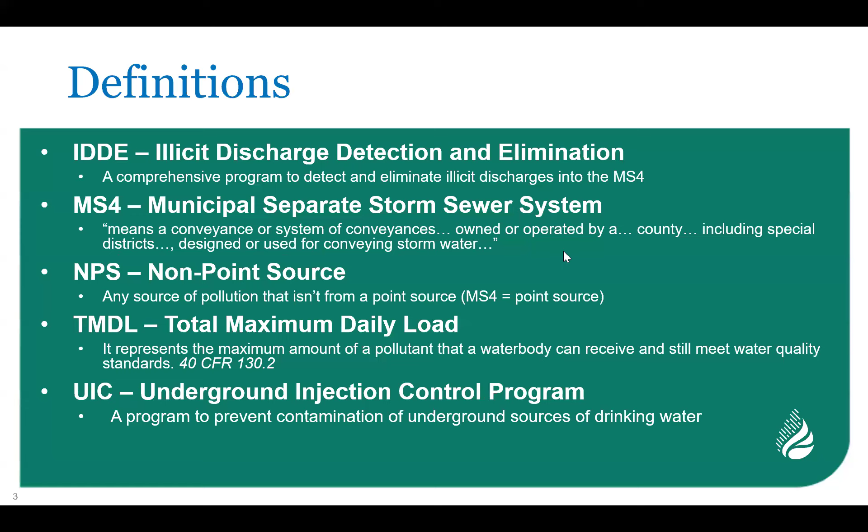A non-point source is everything that's not a point source. A TMDL, you can think of it as a budget of pollution that any water body can receive and still meet water quality standards. And then UICs are dry wells, in short. So typically concrete devices that collect stormwater and inject it underground, at least in our business.

So next, let's get into the difference between a combined and separate storm system. This is just a very elementary illustration of the difference between these two stormwater systems. A great example of the combined configuration on the left is what the city of Portland has, our neighbors to the north. And that's just a series of pipes underground that convey wastewater and stormwater to a wastewater treatment plant.

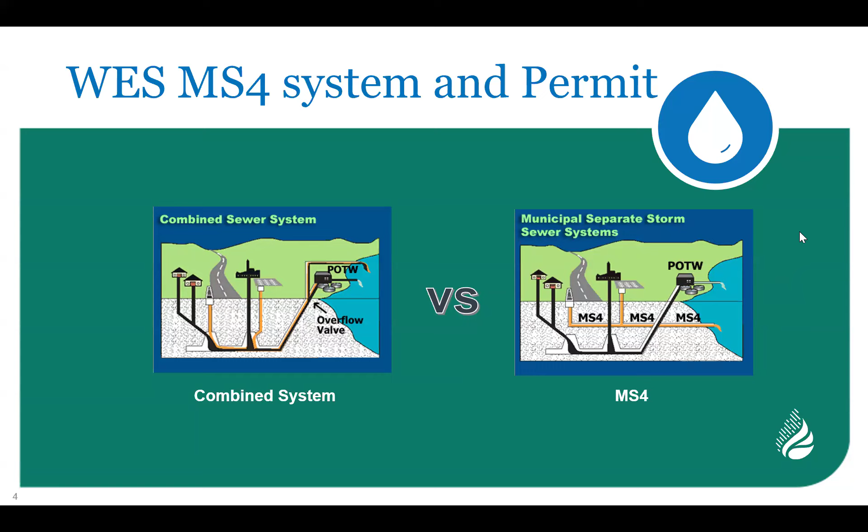This is how a lot of older, large cities were designed in the last century or two or older. And the goal then was to really just get the water away from the city to a river or to a treatment plant. As cities grew and stormwater began to overload those systems, newer communities started building these MS4 systems where the stormwater is conveyed underground, typically in pipes separate from the toilets and sinks and wastewater, which is sent to a treatment plant, and that stormwater is sent straight to a creek, typically untreated and not touched at all, so just straight into a water body.

There are different types of MS4 systems in Oregon, and how Oregon kind of separates those is into a phase 1 and a phase 2 permit. And what separates those two phases is the size of the community, and the cutoff is about 100,000 people that the systems serve.

So I like to use shapes just to think of things. And these two shapes, the octagon for phase 1 and the hexagon for phase 2, do not have to do with UFC fighting or anything. It has to do with minimum control measures, they're called. These are basically practices that the communities do in order to meet the MEP standard for these permits, the maximum extent practicable standard. So these are activities that a community will do to try to minimize pollution.

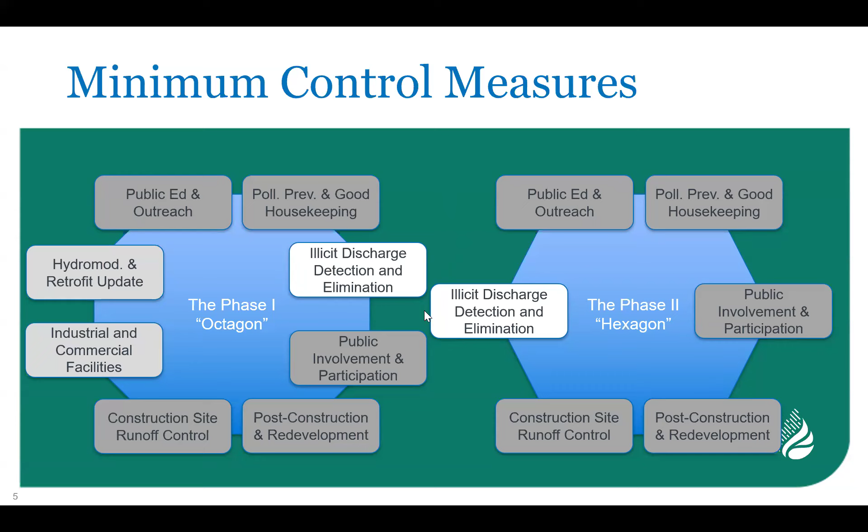And I think the highlight here is that the IDDE program is common amongst both types of permits. There are some other practices and measures in each. There's more in phase 1 than phase 2, but the IDDE is universal, no matter how small or big your community is.

Okay, WES's service area. This slide introduces our service area. In our MS4 population, at least in the WES family, which I'll talk about, there's 90,000 people, about 66 square miles of land that it covers, and over 19,000 catch basins and manholes.

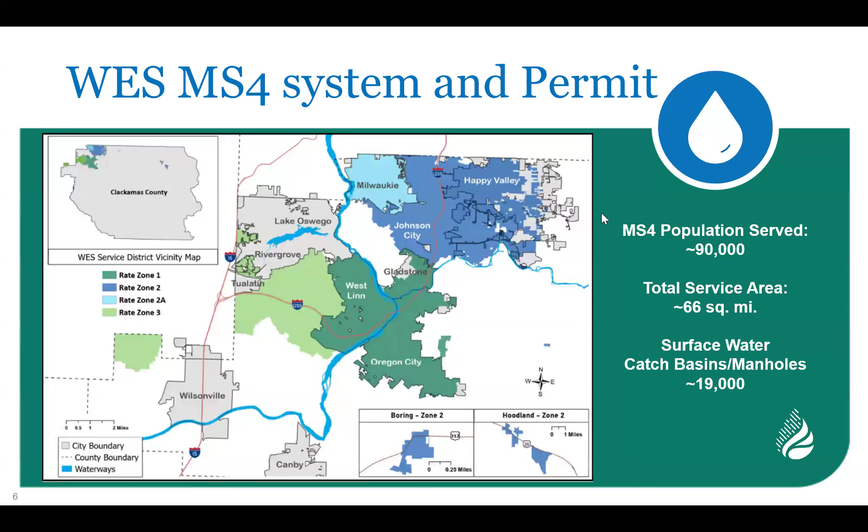So when you're thinking about illicit discharge and protecting the system from illegal dumping or what have you, we can't post a person at every one of those catch basins to watch it every day. So we make a lot of strategic choices to do what we can and target specific areas and problems that we think are out there and just work smart.

But what pushes us into a phase 1 permit is these other co-permitting communities. When you lump us all together, we're in the 150,000 people range, so easily over that threshold. There is a lot of collaboration amongst us 12 co-permittees, and there are things in the permit that tell us to coordinate when there are illicit discharges in other jurisdictions, so that we either respond to them or notify our neighbors if the discharge might affect their system.

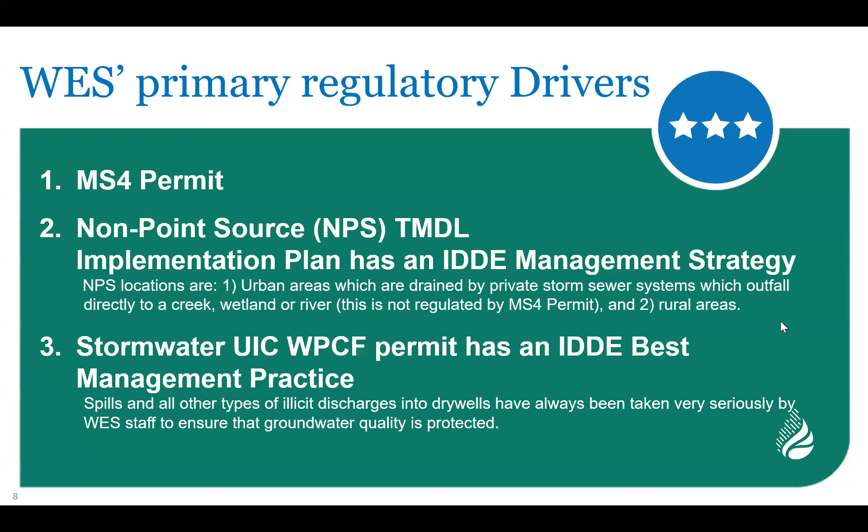We also have a UIC, those dry wells I talked about. We have a permit from the state as well that has an IDDE best management practice, and how that is realized in practice is when there are spills to dry wells, we will also respond to them and report as necessary to the state to protect groundwater quality. That's what that WPCF permit's more about, protecting groundwater quality and drinking water. All right.

What is an illicit discharge? It's basically anything other than stormwater, with a lot of exceptions. There's a small caveat that I try to make: a spill strictly is not necessarily an illicit discharge until it reaches an MS4. So spills can become illicit discharges, and we might respond to them and report them differently, but we still take them seriously. So you can picture something getting spilled at a property, but getting stopped before it reaches a catch basin, which then can flow to a creek.

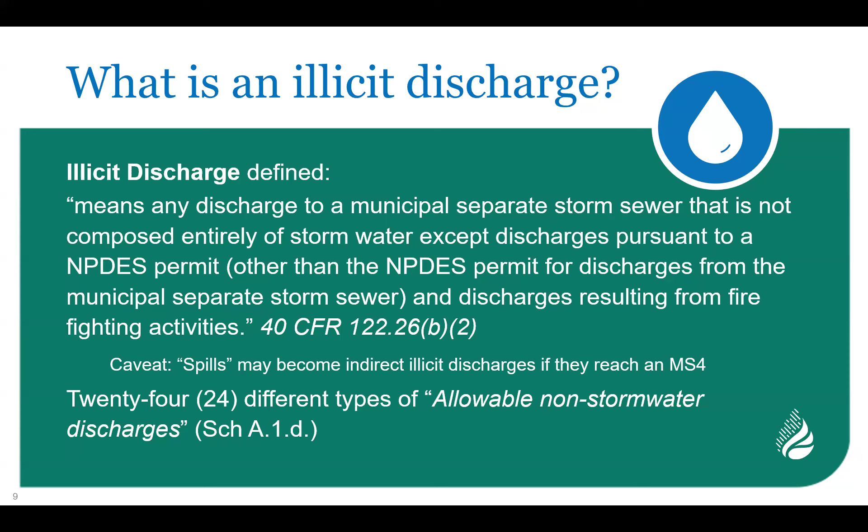Some examples of these allowable non-stormwater discharges from our permit are landscape irrigation water, so a home or a business irrigating their property, as long as the pesticides and fertilizers are used according to their label. Rising groundwater is another example, which could enter an MS4 system underground. And foundation, footing, and crawl space drains. A lot of folks have crawl space sump pumps to keep water away from their foundation in areas of high groundwater, and homes are allowed to discharge that to the storm system.

Okay, so here we want to think about what illicit discharge detection is within the context of a municipal separate storm sewer system. And so I have at the top these two basically prohibited types of illicit discharges, and I segregate them between direct and indirect. It's kind of semantics, because they both have the same negative outcome. But a spill, or in this picture, this is a property that's tracking out a lot of concrete, wastewater, and sludge into the public right-of-way.

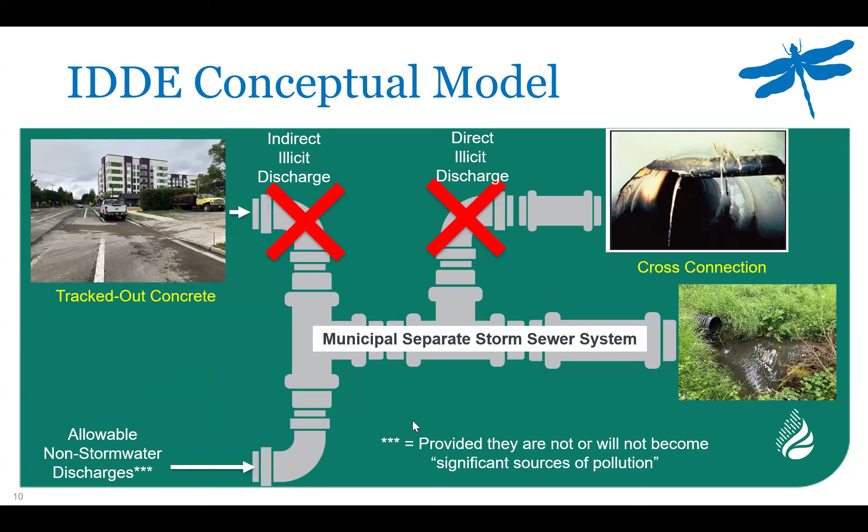Anytime that happens, that usually then gets washed into a public storm system, which then goes straight to a creek, as this diagram shows. And in the top right, you see this crazy photo. This is not something WES has taken. This was out of a reference material, but that's a wastewater pipe that punched through a stormwater pipe and then broke. So it's just dripping straight sewage into the stormwater pipe. So those are both prohibited, obviously, and we try to detect and eliminate those.

In contrast, there are those allowable non-stormwater discharges I talked about earlier as examples. And those are all allowed, provided that they're not significant sources of pollution. So if we find they're recurring or affecting surface water, we would respond.

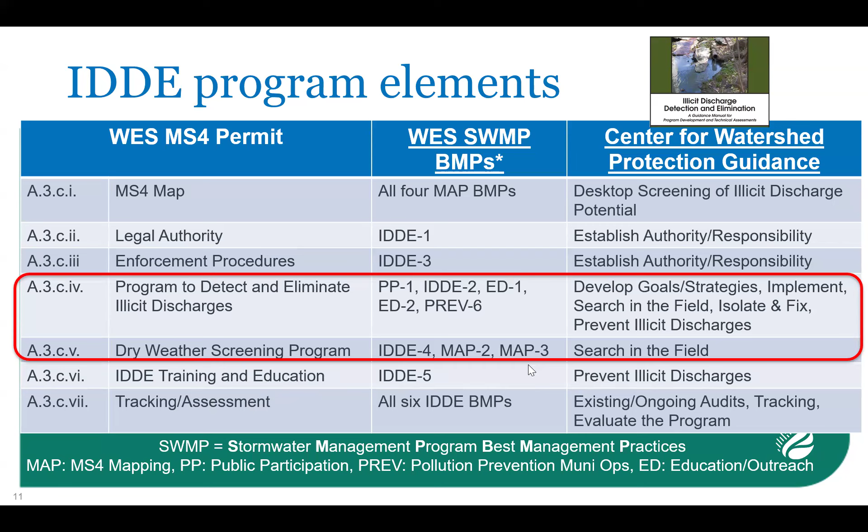What I'll talk about today are just these two elements in the middle, the IDDE program itself, and then our dry weather screening program. But there are other elements that we do separately, like legal authority, which would be our local sewer use rules, and getting those approved and updated appropriately, as well as education and training that happens for internal staff.

So next, I want to go to our historic program. Right now we're going to time travel back to 1995, when I was a wee boy, when WES was first issued its first MS4 permit. At that time, the permit was only 10 pages long, which is wild to think about, considering our current one, which is I think the fourth iteration of our permit, is up to 57 pages. So it's gotten a lot longer, a lot more complex.

Another difference with the first permit and the types of permits issued now is that the stormwater management plan document used to be submitted with the permit application. So it was kind of backwards to how it is now. You'd submit this plan for how you'd implement the permit before you got the permit. It's reversed now, which I believe is a better way. Now we get the permit issued and we have some time to develop a plan to comply with the permit. So things have changed.

Also, our earliest permit had nothing in the permit itself that explicitly called itself IDDE. It said you have to effectively prohibit non-stormwater discharges, which are illicit discharges. But we did talk about IDDE in that first permit's SWMP, or stormwater management plan, as we call it. Actually, I'll call it a SWMP probably moving forward. So that was sort of the IDDE program.

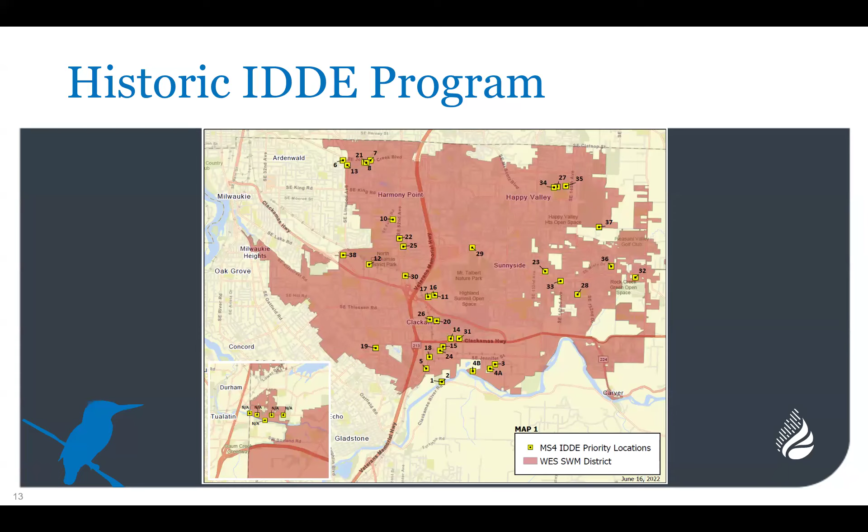Historically, our dry weather outfall inspection program was, until last summer, pretty routine. We would visit about 40 to 43 outfalls that were in the exact same place every year during the dry season, after there had been no rain for 72 hours. We'd go to these big pipes and look for water. There shouldn't be any water if it hasn't rained and it's a storm system. And if we found water, we would trace it upstream to try to find if there was a source of illicit discharge. And we would rarely find any illicit discharge sources this way.

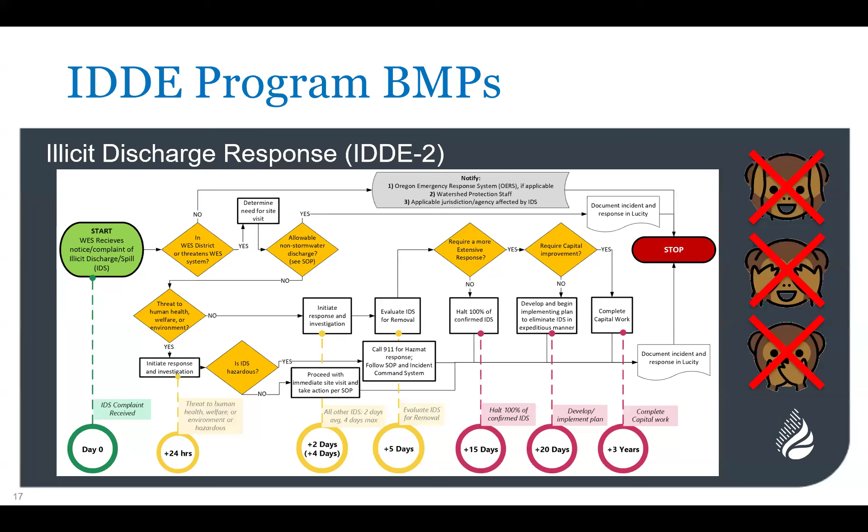We're supposed to respond by immediately halting the discharge or calling the right parties if it's a hazardous material pretty soon after that. And in the case of really complicated illicit discharges, where we need to do capital projects to resolve them, we have a lot longer timelines. But this is really the complicated part of documenting, telling the right people, notifying our neighbors when necessary, writing OERS reports, with an emphasis on these deadlines our permit requires.

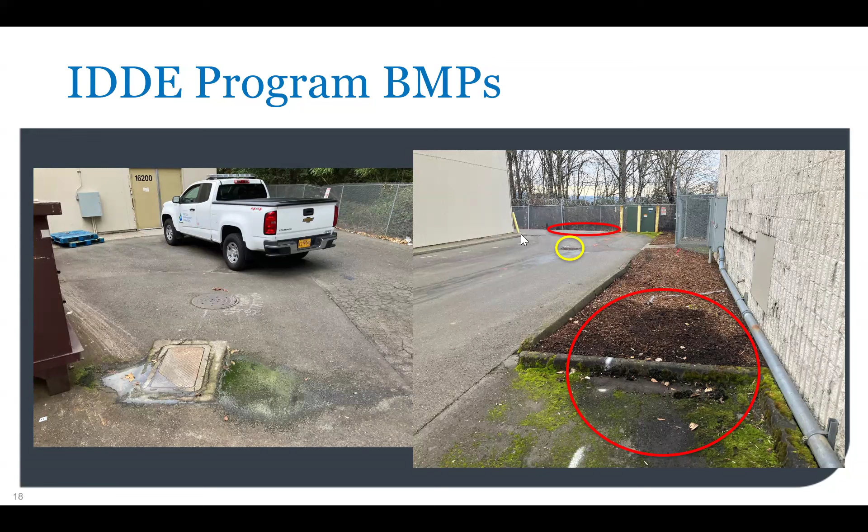So not a great outcome at all. And the property owners, once we told them about it, got on fixing it. But I think this was a good example of public complaints helping us find this. It's kind of tucked away from the public roadway. We probably wouldn't have seen it as easily on our own. And it was a private lift station, so it wouldn't have been something we'd maintain at WES. It'd be something the property owner was responsible for.

It should not be waste up to the bottom of the lid. It was so full and overflowing that it was spilling into the parking area, flowing down to a catch basin, which then flowed to a private dry well on the property. But cars were driving through this waste. Customers were parking their cars and walking through the wastewater and tracking it indoors.

And we weren't getting a lot of great response from the establishment at first. So we called our partners at the public health department, told them what was going on, made clear that we saw customers tracking this indoors, and the public health department shut the restaurant down and said, you need to clean this up before we're going to reopen you again. And that got the restaurant's attention, and they wanted to open back up again.

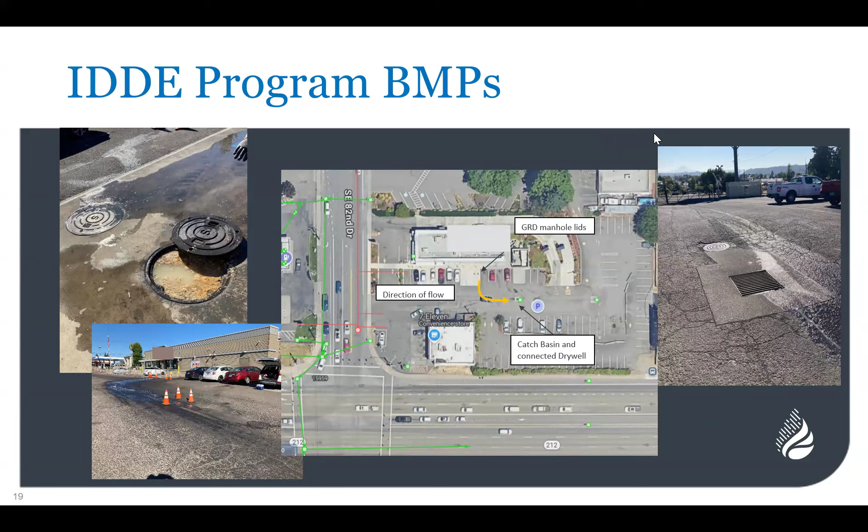So they agreed to keep this interceptor pumped down until they could make the necessary repairs. And they continued to pump the interceptor down in real time for a couple weeks until they could make the correct repairs and have it drain freely again. Because WES continued to visit this restaurant for those weeks to make sure they kept the interceptor down and it didn't continue to spill, so that the restaurant could open up again and serve customers. So we were staying on top of it. The restaurant eventually repaired this, and things are going better now. But this was just kind of a fortuitous illicit discharge we stumbled on.

It's essentially a negotiation we made with a private vendor that will clean private storm drains on properties at a discounted rate. So anytime we're inspecting a property, doing a private stormwater system inspection, maybe we see that their catch basins and storm drains need maintenance. We always try to educate the property owner that, hey, we have this program. If you want a reduced cost to clean this storm drain, feel free to reach out to this vendor. And we evaluate those vendors. I think we look at it every year or two just to make sure they still are meeting performance standards we make for them.

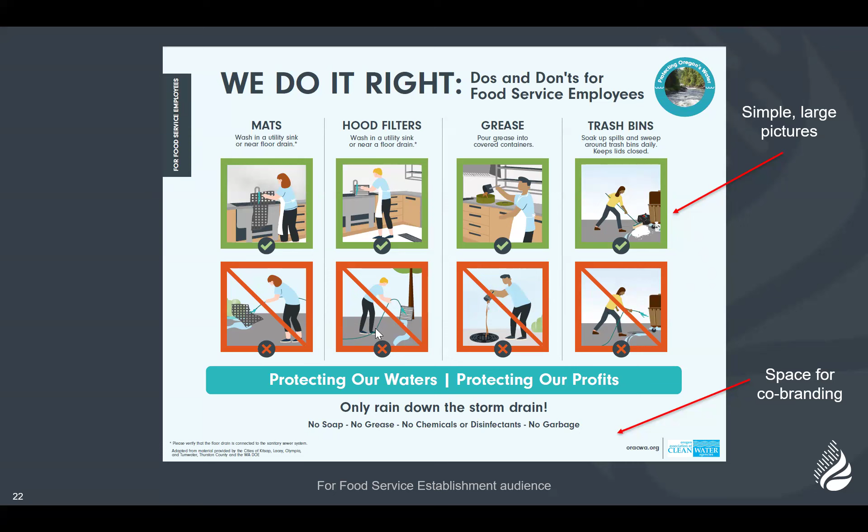This is another example of one of those items from the toolkit that I thought was fun to bring up, because of that food service establishment case study. This is something we've given to some FSEs that has these big clear pictures. I believe there's a copy in Spanish too. There's also space for co-branding at the bottom to put a community logo on, or a WES logo, for example, and it shows what not to do.

Like in this picture on the right, this guy is just straight draining his grease container into a manhole. That's not what we want. Or washing their hood filters outside.

Moving on to the IDDE program, I want to leave some time for questions, but our TV inspection is another important part. We're looking in our sanitary sewer lines all the time, looking for cross connections this way, and reviewing redevelopment permits. When we're cleaning our stormwater ponds, we're looking for illicit discharges there.

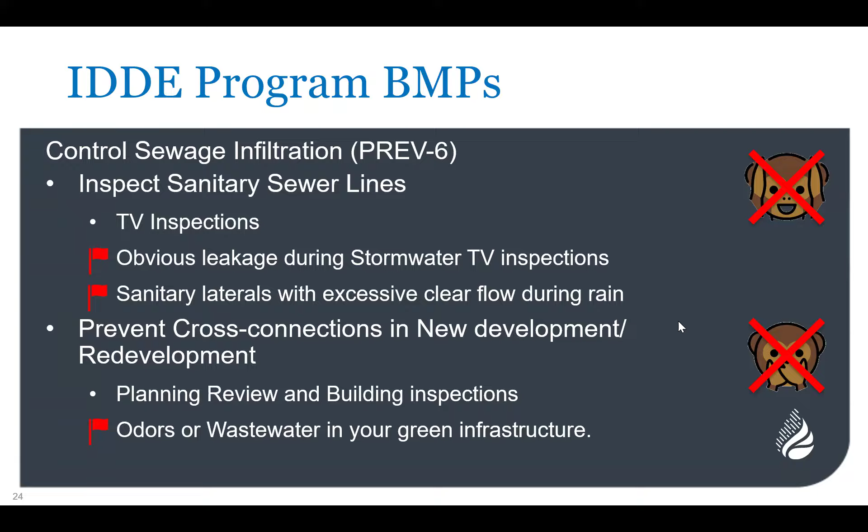There have been instances where we've seen toilet paper and wastewater coming into a stormwater pond, and that is a sure sign of a cross connection. So we've stopped some cross connections that way in the past year or two.

And now I want to move on to our dry weather program. Our dry weather inspection program, like I said in the beginning, we would visit those 43 outfalls every summer. We called those major outfalls - they were large pipes serving very large drainage areas. We also lumped in some minor outfalls.

But last summer, we suddenly had a new approach to inspecting those dry weather outfalls, something we hadn't done before. We made a measurable goal for ourselves to inspect 10% of our known outfalls each year in our entire service area. That's roughly 70 to 90 outfalls each summer we're targeting, over double what we used to inspect, and some of these outfalls we've never been to since they were maybe constructed.

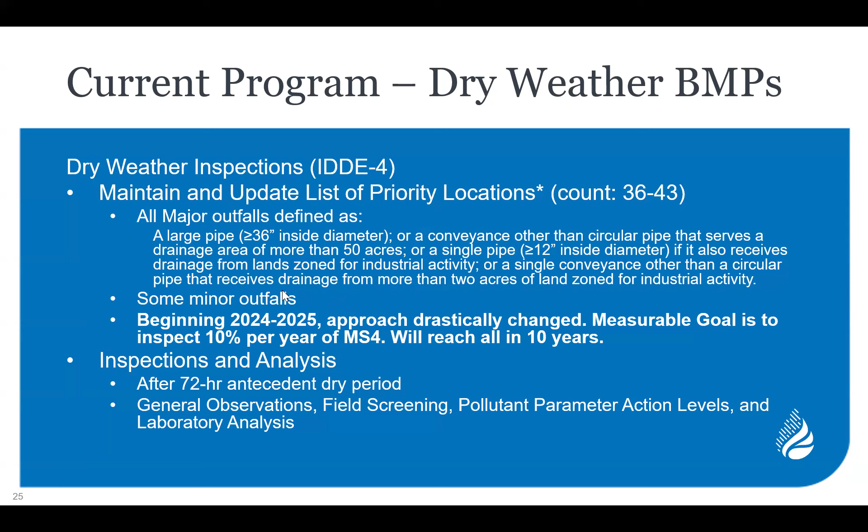So we're getting a lot of information when we go there - access notes, any missing attributes like the material the pipe's made out of, is the size correct, or was there a problem when we mapped it from the as-built documents? We're also looking for illicit discharges when we're on site.

So how we thought and dreamed up that process would work - we knew we wanted to divide all of our outfalls into 10 groups to cover all of our outfalls in 10 years. We also knew we wanted to geographically cluster those groups so our inspectors weren't scooting all over basically unincorporated Clackamas County and the city of Happy Valley each summer.

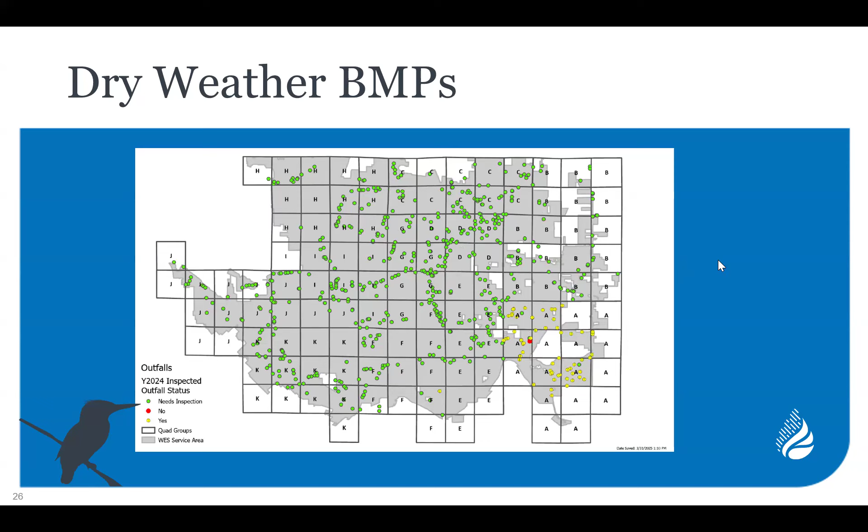Our GIS analyst split our service area into squares called quarter quads and basically counted up to between 70 and 90 and grouped those as group A. The first summer we inspected group A. There are some other dots in there that aren't yellow as inspected, which were mapped after - we'll just have to go back and visit either this coming summer or the next. Group B is in the Northeast, and we continue, shooting to get through all of them in 10 years.

I'm going to skip over these two so I leave time, but these are the handout materials our GIS analyst made for us - really beautiful detailed aerials of the outfalls and adjacent features, tax lots, anything that can help us get to the outfall.

Our field crews each spring get the same grouping list from us and help clear vegetation to the outfalls where they can. So once summer starts, we can go find these outfalls easier instead of hacking through blackberry bushes that are 7 feet tall.

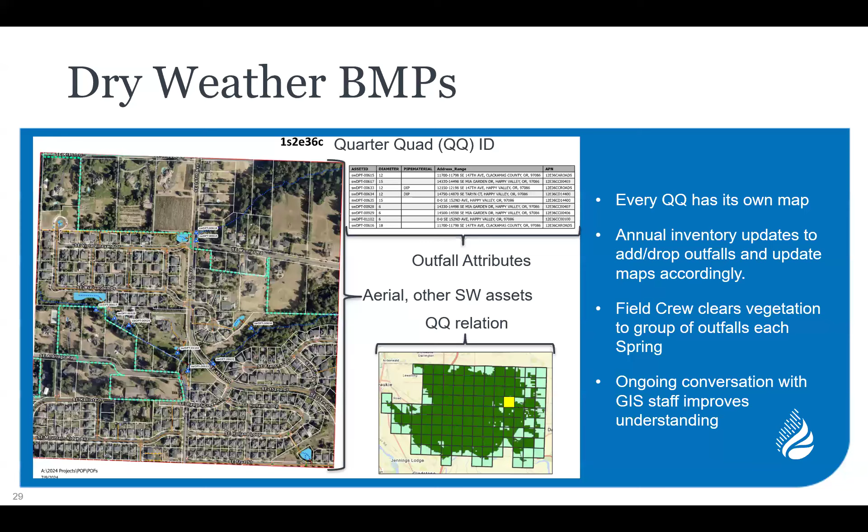We continue having ongoing conversations with GIS so that the mapping stays updated, and we send data back to GIS about these inspections we do. If there's updates to the attribute table, like we find that a pipe is actually a plastic pipe and not a concrete pipe, or it's a 16-inch instead of a 12-inch pipe, we can update our GIS file.

If we find water when we get to an outfall pipe, these are the six parameters that we can quickly measure with field meters. It's sort of a workflow process. We'll collect a sample of that water we find, and if it is in these green areas, we determine that the water is an allowable discharge and move on from that outfall. If it's in the red areas, or there are other physical observations like an oil sheen, but it's still in the green areas otherwise, we'll investigate further and trace it up the system to try to find the source of the illicit discharge.

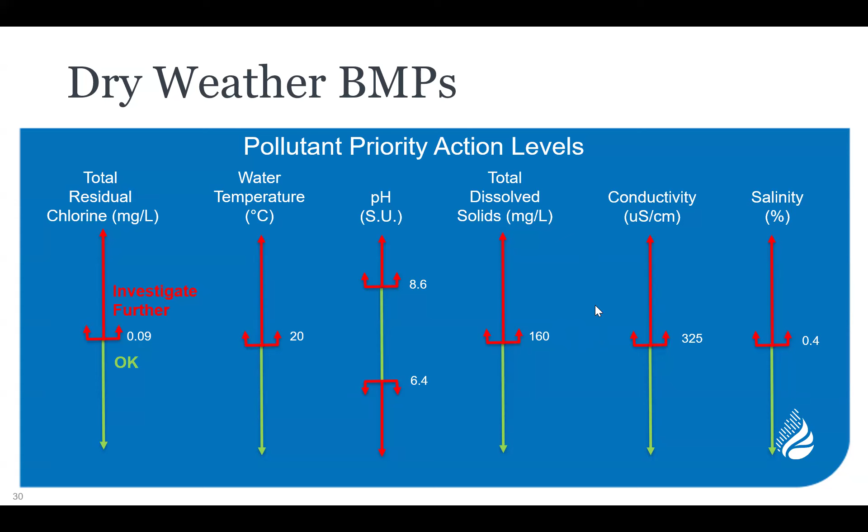The main goal of these action levels is to be efficient with our work and not chase down every single discharge we find, because some of them are allowable. It could just be irrigation water, as an example, or foundation drains.

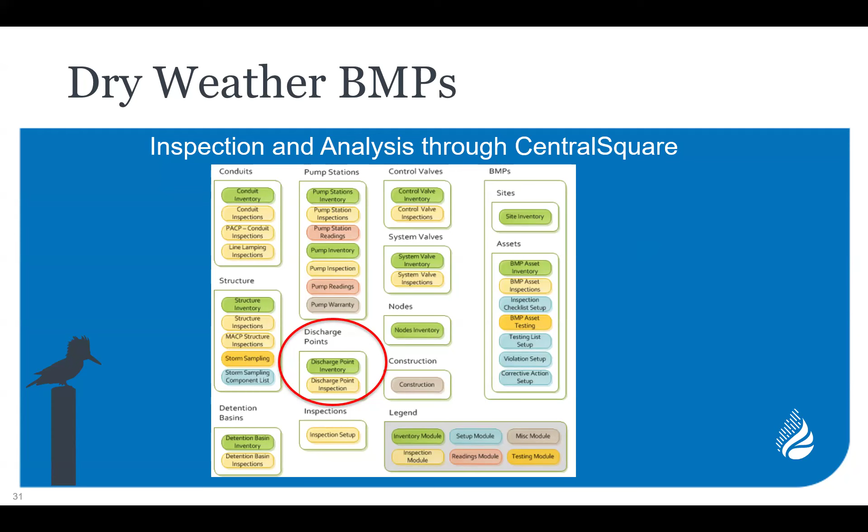The last thing I'll talk about is how we're doing these inspections now. We used to have a big three-ring binder that weighed 60 pounds, which we'd carry around and write on paper. We're now using CentralSquare, which is basically an asset maintenance database. All of those outfalls that we have mapped are their own assets, and we just apply inspection forms to each asset. So when we visit them in the summer, we just create a new inspection on the discharge pipe or outfall, and we do it all on tablets.

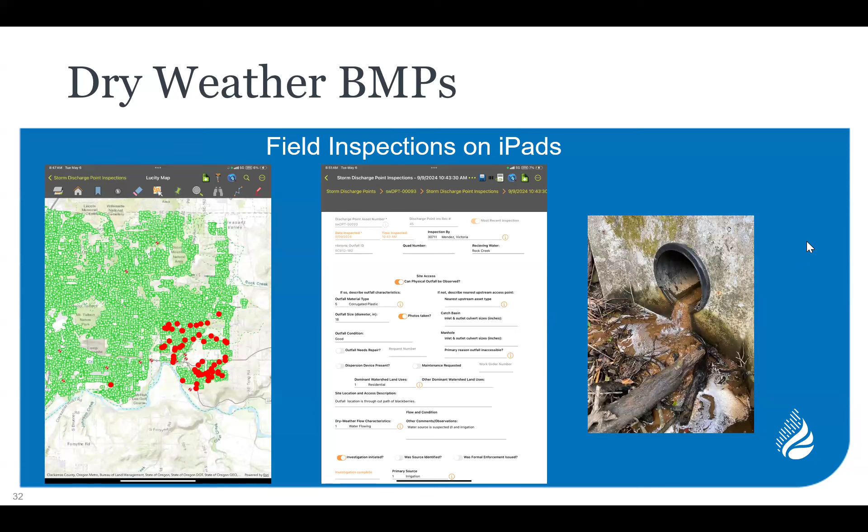We piloted it last year, and this is a screenshot of what our tablets look like, showing our stormwater assets in the field. All the red dots are the inspected outfalls on the left. In the middle is our inspection form, which we can fully customize. On the right is a photo of an outfall we actually went to - we can take the photo on the tablet and upload it directly to the form without having to download photos from our phone and attach them in the office.

The last dry weather BMP is just updating and maintaining our map of outfalls, which this new inspection approach is allowing us to do in tandem with the actual field surveys. So we're knocking two dominoes over at the same time, fulfilling two of these BMPs.

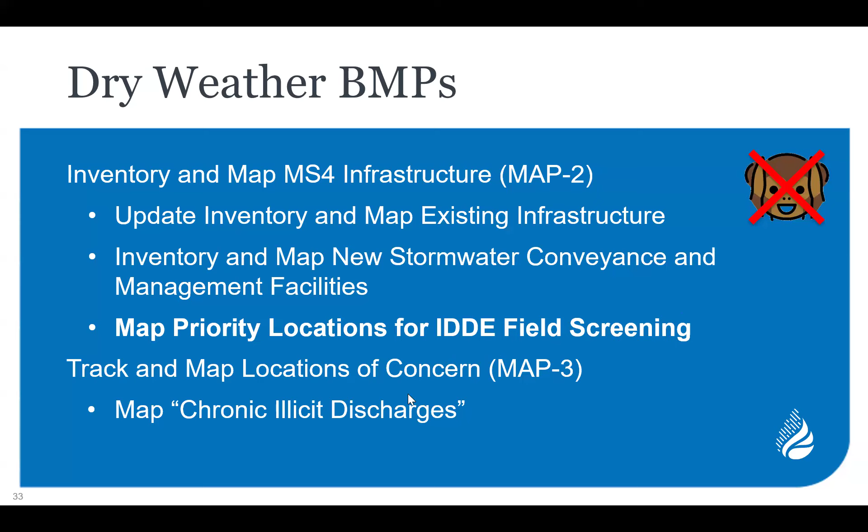In bold here, the priority locations mapping is something we did when we had just 40 outfalls that we inspected every single year. But now that we're visiting all of them and not prioritizing any of them, we don't need to pay attention to that anymore, which is a little less work for us in a sense. We're just going to visit them all instead of a select subset.

And then chronic illicit discharges are a special case that can come up from time to time. So, last slide for questions.